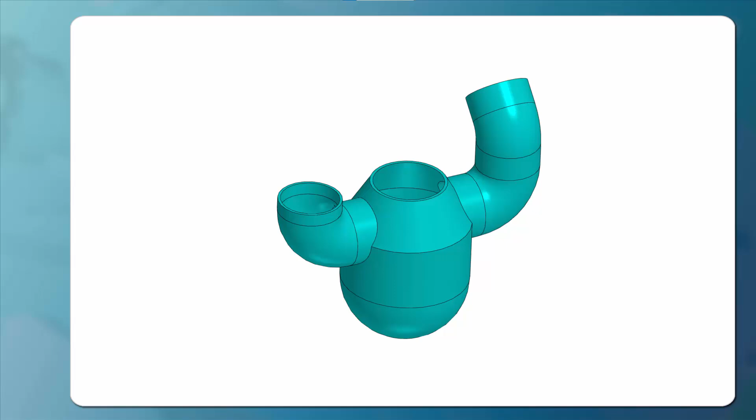Create a new part document. Right-click in the tree to open the Model Properties toolbar. Enter the name and designation. Complete the command. Save the document.

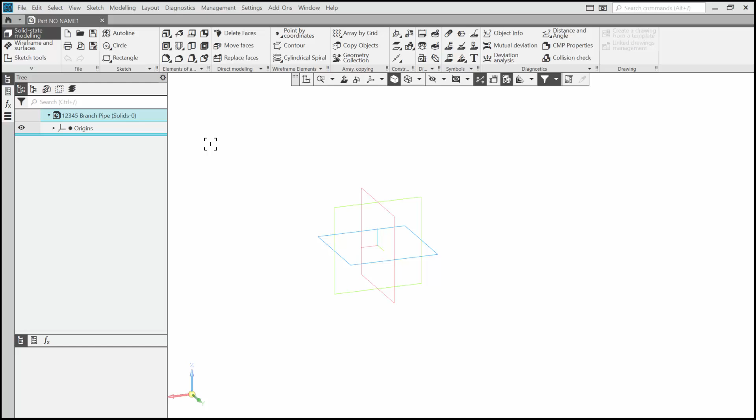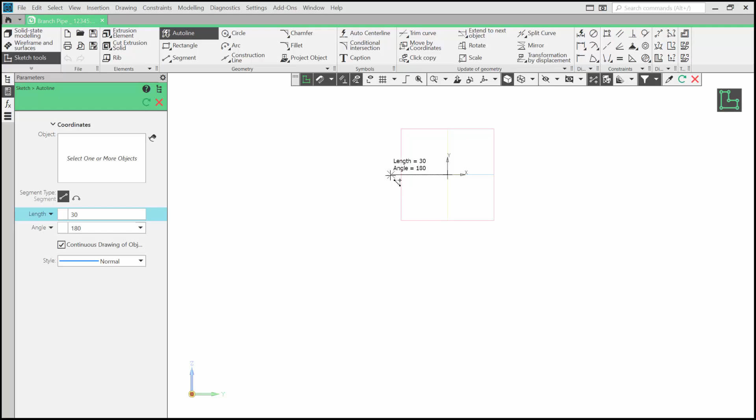Let's start by creating this part of the pipe. We'll use the revolution element command for it. Select the ZY plane to create a sketch. Start the AutoLine command. Create 3 segments like I'm doing now. The first one should be horizontal, the second at an angle, and the third vertical. If you made a mistake, you can always correct it using Ctrl-Z.

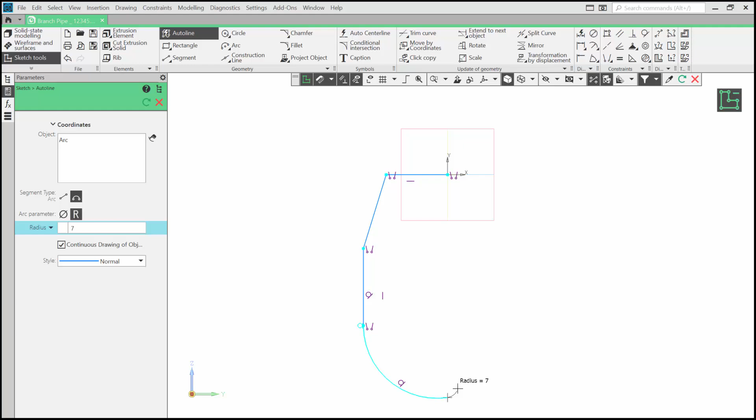Now let me change the segment type in the Parameters toolbar. You may need to move your cursor to specify the correct arc. Follow the preview. Align the end point of the arc with the start point of the profile. Switch the segment type again. Alternatively, you can select the type in the context menu. Right-click and select Segment. Close the contour by selecting the start point. Press the Escape key to stop the command.

Notice that in this case the tangency constraint has been applied automatically. Let's add dimensions to the sketch. Use the Smart Dimension command.

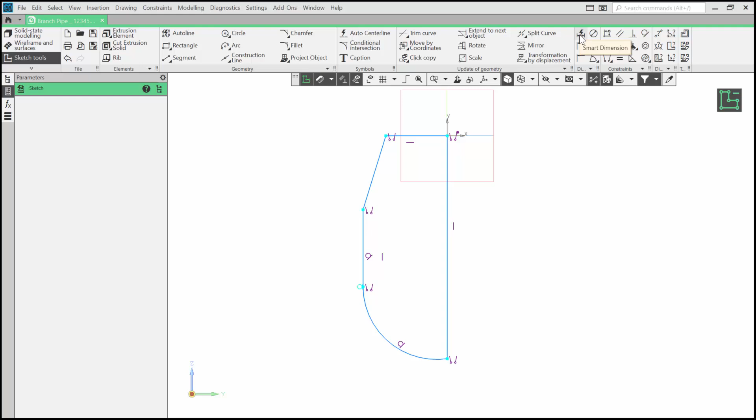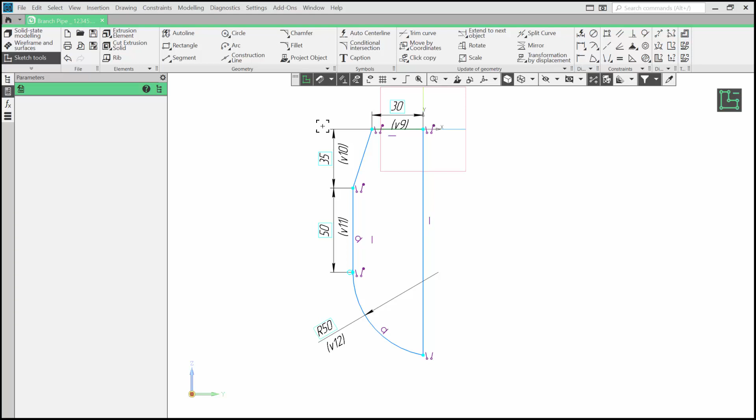Let me check if the sketch is completely defined. Click Display Degrees of Freedom. You can see that there are some pink arrows. This means that the sketch is not completely defined. You can pause the video and try to guess what constraints or dimensions are needed to completely define the sketch. To understand what is wrong, you can try moving the elements.

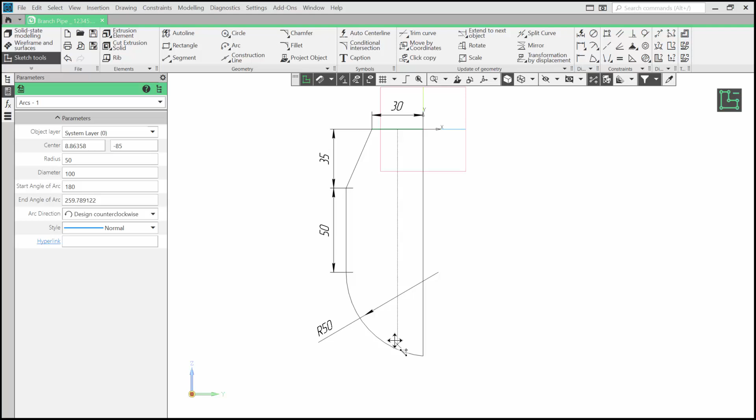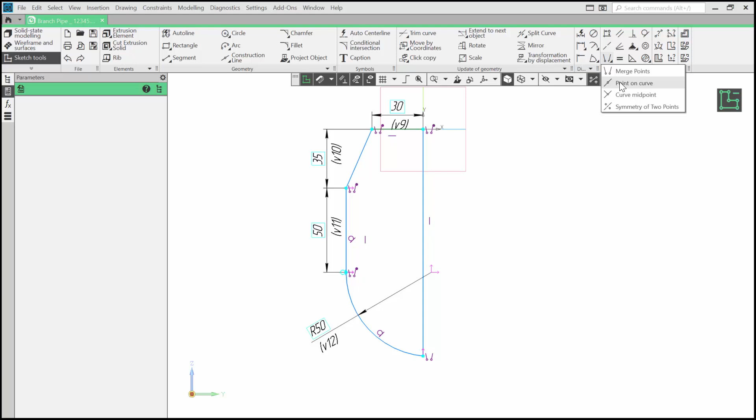I think that in our case we didn't define the position of the arc's center. It must lie on the revolution axis, or we won't get the correct part. Let's fix that. Press Escape to deselect the arc. Select the Point on Curve command from the Merge Points group. Select the segment intended to be the revolution axis. Then select the arc center.

Stop the command. You can see that all elements are dark green. It means the sketch is completely defined. Change the line style for the segment to define it as the revolution axis. Select Centerline.

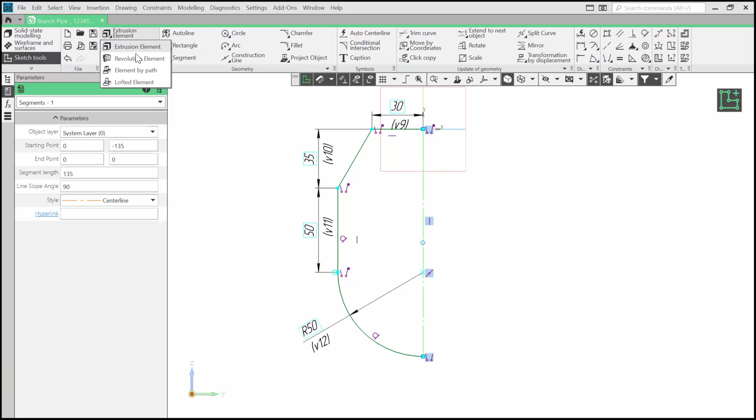Start the revolution element command. Note that we can turn on the Thin Walled Element switch right now. But since our entire part is hollow, not just this element, it will be more convenient to use the shell command later for the detail. Confirm and complete the command.